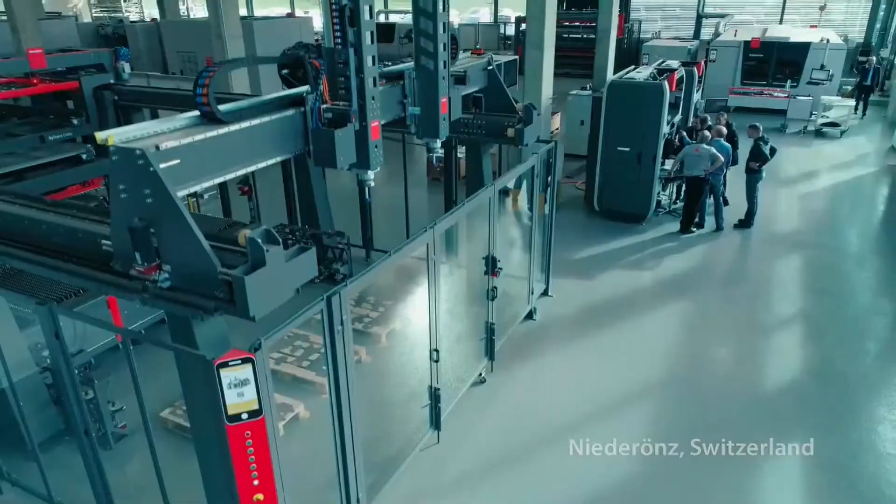Bystronic is a leading global supplier of system solutions for the sheet metal industry. We provide laser cutting systems, bending systems, automation, software solutions, and comprehensive services.

Sorry, I need a sip. He's good, no? He has a confident voice, yes. Shall we? Client happy, but please get to the end of the line this time and add a little verve. The verve is there. You may not be able to hear it right now, but you will in post-production. In post, we are in...

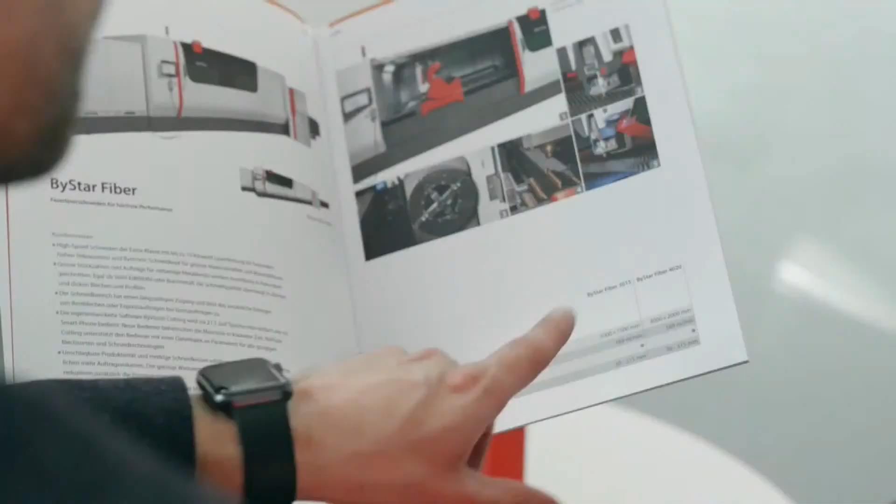We offer worldwide presence and competence. We speak your language and understand your needs. We are here for you.

Sorry, we are here for you. I hear the words, but I'm not getting anything from them, you know? Could you please just say the lines?

It means that we offer much more than just a machine. We support our customers with flexible financing models, training, maintenance, a long-term spare parts service, phone hotlines and online support. And we also operate local sales and support offices in many, many countries.

Yes, now you see, now it's coming alive. We should be saying this. It is more text, though, so we will have to renegotiate with my agent. Can't you just record it and we'll look at it later? I'd love to, but my agent would kill me. If only. Fine then, continue with the script. Right you are. Where were we? At customer service and post-sales services, would you believe? Rolling.

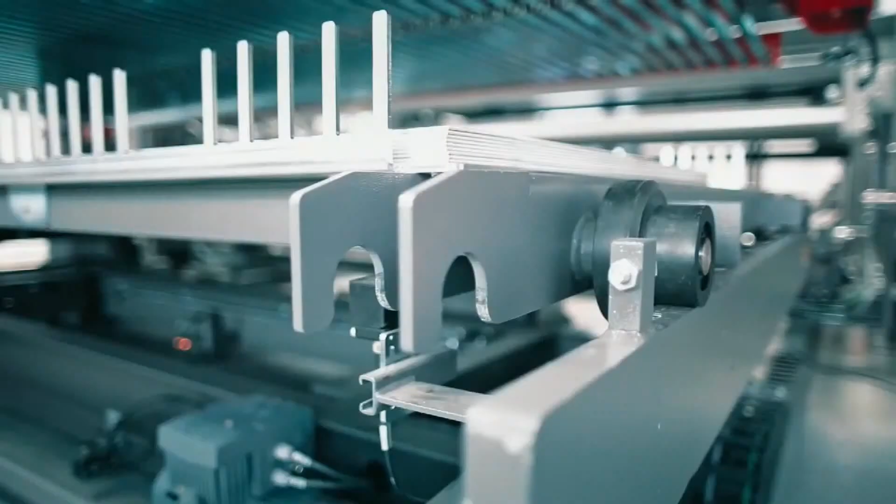We don't simply develop machines that cut or bend sheet metal. No, our customers need flexible systems for ever-changing order positions and batch sizes. Automation to achieve top productivity with integrated systems and the right software that cross-links everything.

Bystronic stands for Swiss quality. Sorry. Really? Swiss quality, I mean, it's a bit of a cliche, isn't it? And actually, while we're at it, your slogan, best choice, kind of sounds like we've just won the buzzword bingo. Guys, if you want to sort this out, I'm just going to pop out for a smoke.

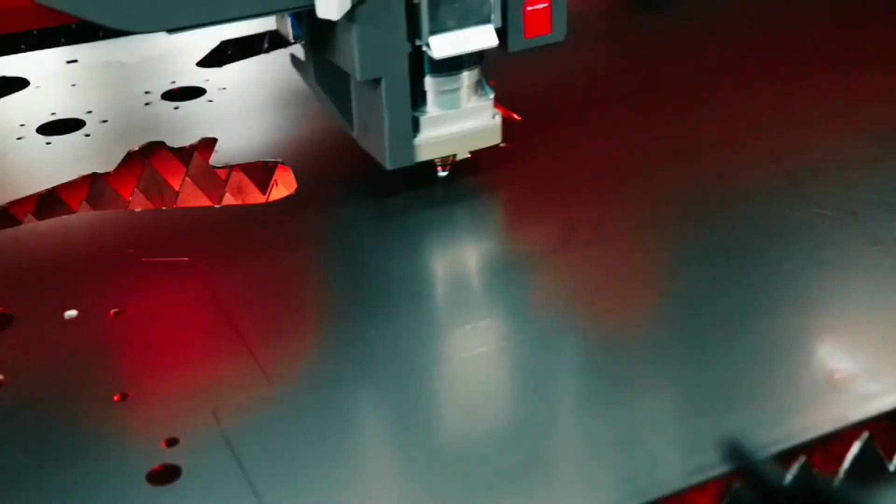Let me explain. First of all, Swiss quality. Do you know the ByStar Fiber? The Bytrans Cross or BySoft? Have you ever seen them laser cutting and bending those sheets? It's like butter. Once you've seen it, you can't help but be excited. The beauty of a laser cut, the precision of a bent metal sheet, from very small to very large, but all with the precision of Swiss clockwork, perfectly formed and expertly fitted.

Now, best choice. When you say yes to a partner, be it in business or private life, you make a commitment to the future. Bless you, Katie. Now, you're still young, but one day, you're going to want someone for the long run, someone who shares your vision for the future. You see, at Bystronic, we think about tomorrow's sheet metal processing.

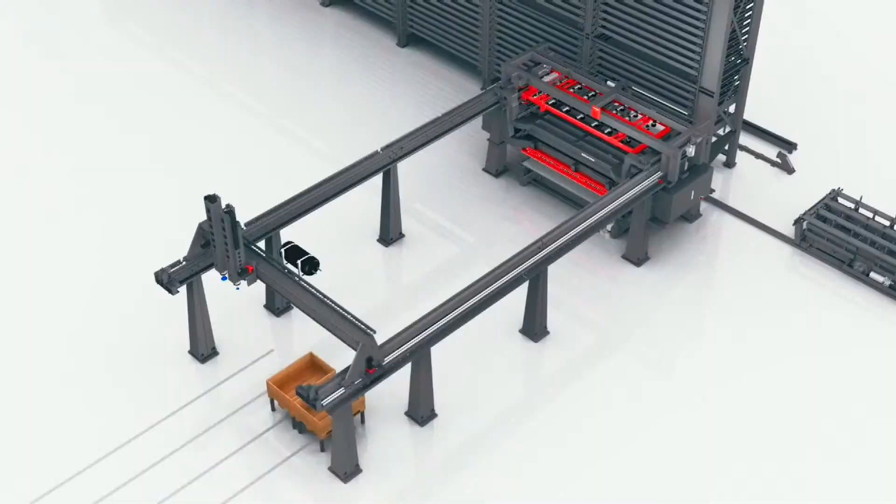We have some footage of that, right? In what we call the Smart Factory, variable orders will be produced automatically on flexible systems. A clear vision and state-of-the-art technology means cost and process optimization, which in turn means higher earnings.

And who's behind this success? The employees of Bystronic worldwide. Now, you'll say that's just another cliche, but nobody else sets new standards like they do, with their enthusiasm, their ideas, and their know-how. Actually, I stand corrected, because our success is also due to our clients. It's their feedback that we use to develop new technologies, and until they are perfectly functioning, we will not launch them. And none of our employees will settle for less, not in Asia, not in America, not in Europe, not in Switzerland, nowhere. And that's what we mean by best choice.

I'm sorry, I think I interrupted you. Did you record this? Sorry, did he say something? I couldn't hear a word. He says we're done. Really? That looked like more words to me. No, really, we're done. But you can stay here till 5, because it's in your contract. Well, no, I'm more than happy to do another version. We'll just speak to my agent later on. That's no problem. Gentlemen? Hello?

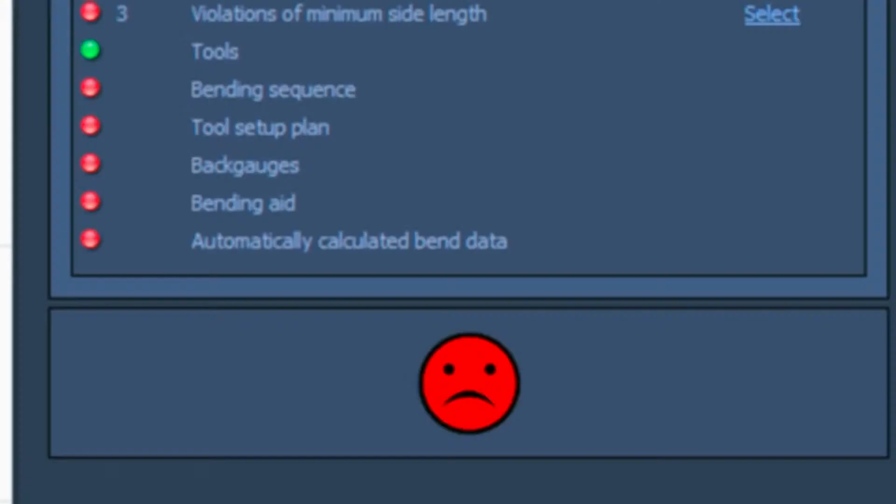All of this is set up as a process-oriented workflow from file to part, with integrated checkpoints. Oops, something is not quite right there. Not a problem. Easy done.

And of course, we want to make optimal use of the material. This is why we should better let the software handle the nesting. In BySoft 7, creating automated cutting plans is quite simply phenomenal. Thanks to the cutting time simulation, you know the complete process even before you start cutting. And all of this is that simple and intuitive.

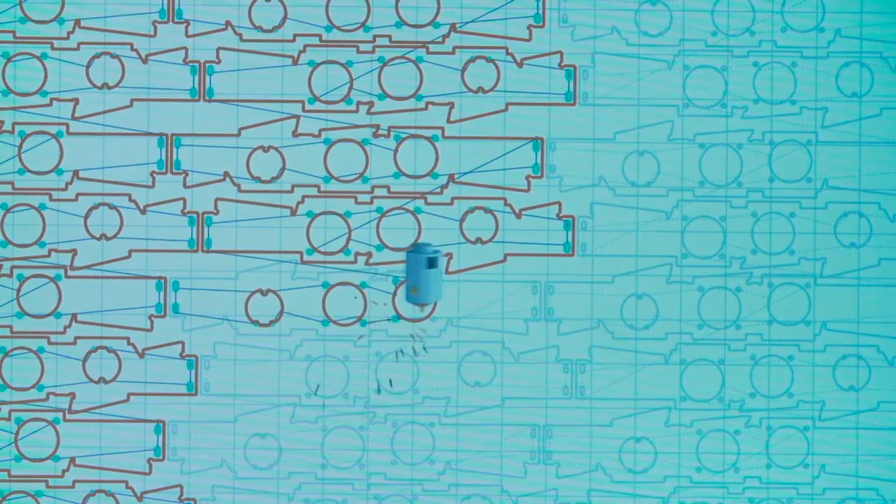From the people who prepare the orders through to the team in manufacturing, this makes everyone happy, particularly because now we can precisely calculate the production-related unit costs and prepare customer offers. Right, programming done and dusted? Well then, here we go.

The finished headlight bracket. Now, all I need is the tractor. I need the tractor! Hello? Well, I guess we were faster than expected.

BySoft 7. Make it easy.

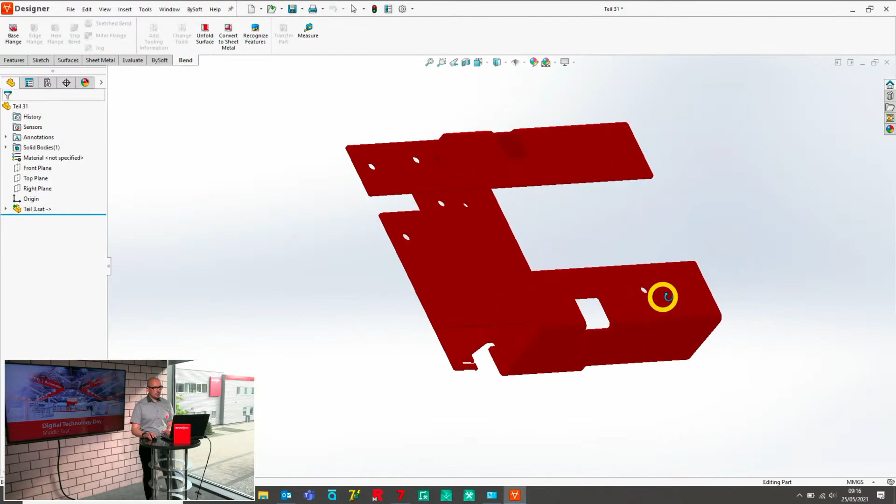First of all, we open a part. Let's say we take this one, open the part, and you see it opens in a second module. This is the part we will produce. It looks like this. First of all, we make it flat.

We have this option to select the part. Of course, if we have an assembly, we can unfold every part step by step. We just select the green sign to say, okay, this we will unfold. Now we have the flat part, and we transfer this to BySoft 7.

First of all, I get the name, which of course is the name from the part. I can rename it and so on, but I'll leave the name like this.

We can also select the material. This is important - is it a kind of steel, stainless steel, aluminium, or whatever? We have a lot of materials here in our database, and the material thickness comes from the 3D file. Then we hit the OK button, and we're finished importing.

Now we have to program the part for our machines. This is a bending part, so first we have to program the bending sequence and everything needed for the bending machine. After that, we have to program the cutting machine so we can send this to both machines and say, okay, now we cut the part and bend the part.

Okay, how it works is really simple. You see these little areas here - first is called bend, the other is cutting. If I select the bend area, the software asks me about the right bending machine.

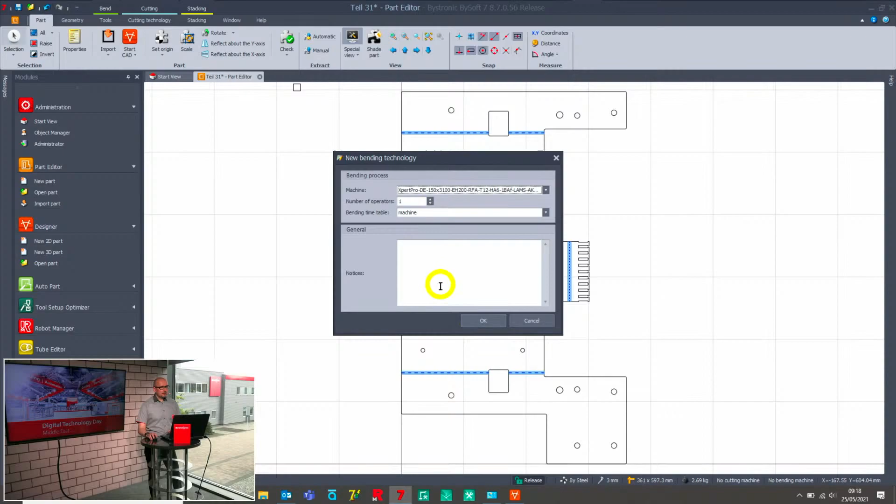If you have more than one, you can select a different one. You can say how many people you need to bend the part later on - for example, if you have a big part and need some guys to help, you can say I need 2 people. And if you like, you can also calculate the bending time.

We say okay, and now the software looks for this machine, what kind of tools we have in this machine. You can also have tool cabinets selected in the machine, so the software knows how many tools I have and what kind of tools I have. We can also have a pre-selection of tools here - this is the P5 and the V20.

If we stay in the bending area, you see a lot of points here. Now we have just these red areas. This red means it's not finished or programmed, or maybe there are some mistakes if you program this manually.

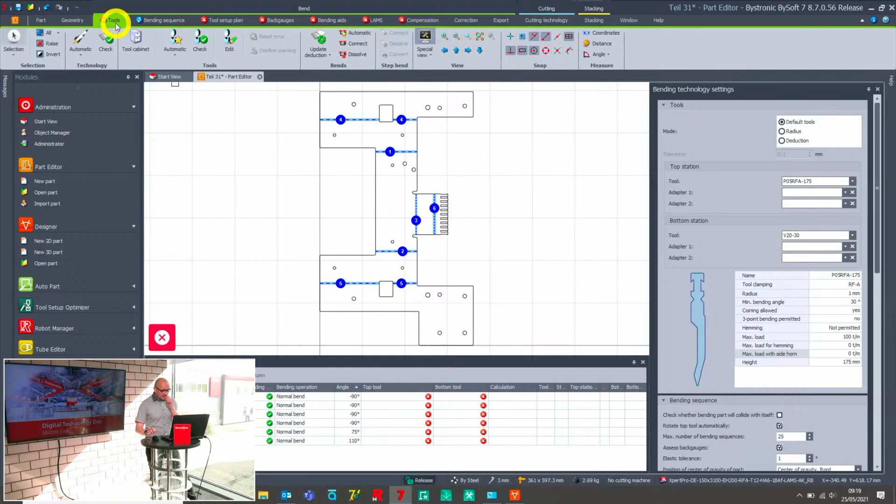Okay, how does it work now? You can hit the automatic button like this, or you can use the little automatic button, this rocket sign.

Then the software calculates everything for me. You've seen if I press this button, I can do it again. You see in the middle that the software also defined a different tool setup - it sees that I cannot use my standard tools for this material thickness and selects a different one. In our case, this is more or less the same tool, but with a different height.

Now you also see different colors here. The blue one, let me go a little closer, is my bend radius. And the yellow one is very important - this is my insert area for the die.

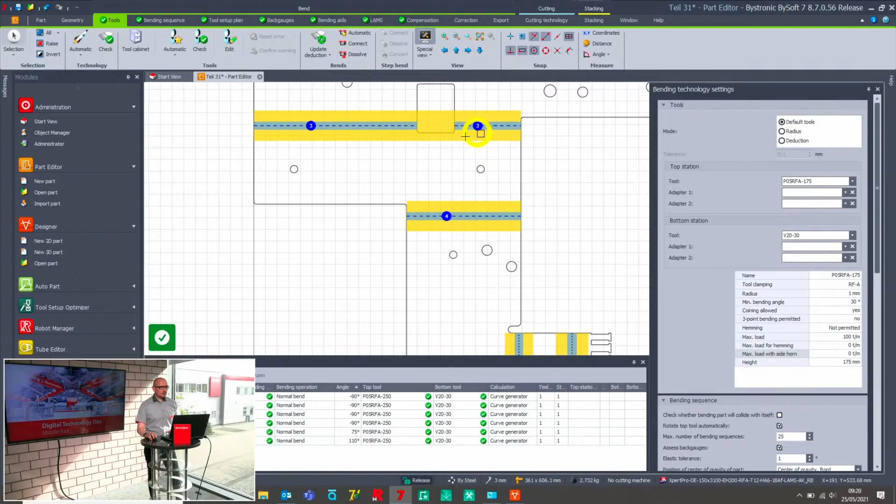This means if you have some contours inside, holes or something like this, it could deform during the bend, and the software can check for this. If you have a contour inside here, it will say please take a smaller tool or a different tool so you don't get this deformation.

In our case, everything is okay. You see now all the steps here are green, and we can save the part and move it to the bending machine. Just in case you'd like to change something, you can go to every area.

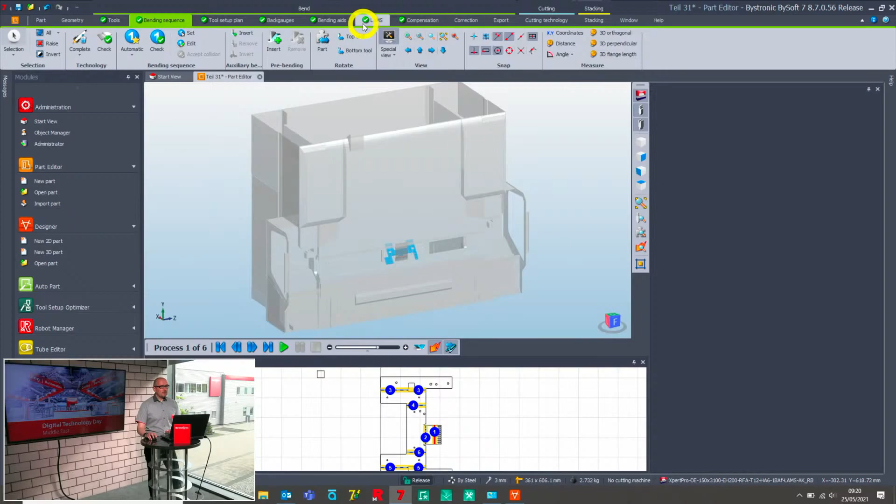This depends a bit on what kind of machines you have. You have to program the bending sequence, the tool setup, the back gauge position, of course the bending aid, and the LAMS system if you have one, and then you can transfer to the bending machine.

If you press this play button, you can also simulate the bending sequence. Sometimes it's necessary if you have a really complicated part and you get into collision, so you can look at what place you have the collision or what the problem is. In this case, the software found a great solution for us with just one tool station, and we can transfer the part to the bending machine.

How it works is really simple. We can go to the export area, and you see we have two different versions to export. Manually means I select my folder manually. If I use the normal export button, then I can export the part automatically to the bending machine.

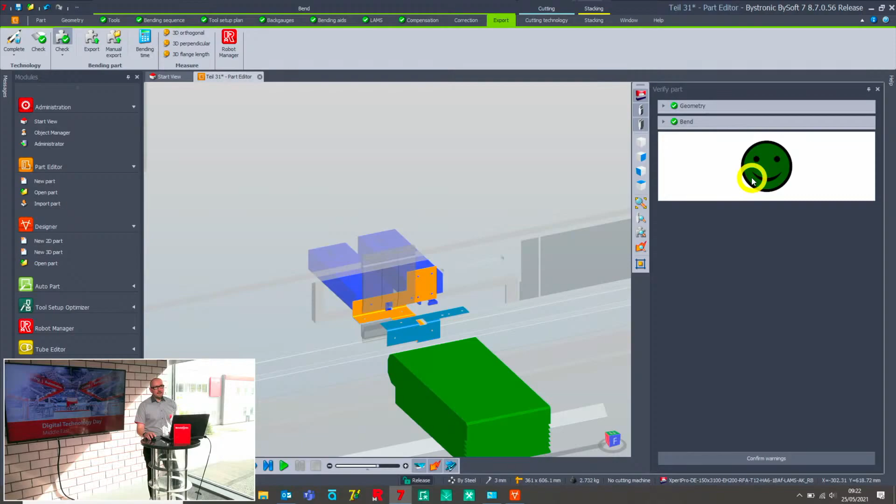If you're not really sure if everything is okay, you can hit the check button, and then you see the green smiley here. This means everything is okay. If you have some problems with the part or with the technology on the part, you get the yellow one, or if everything is really wrong, then this will be red. We check the contours, and also we check the bending technology.

Okay, now we have programmed the bending part. What is the next step? You see it's direct, close to the bending area, is the cutting area. We go to the cutting technology, select our cutting machine, hit the OK button, and this is more or less the same. If you don't like to program this manually, you can hit the rocket button for automatic generating of the cutting technology.

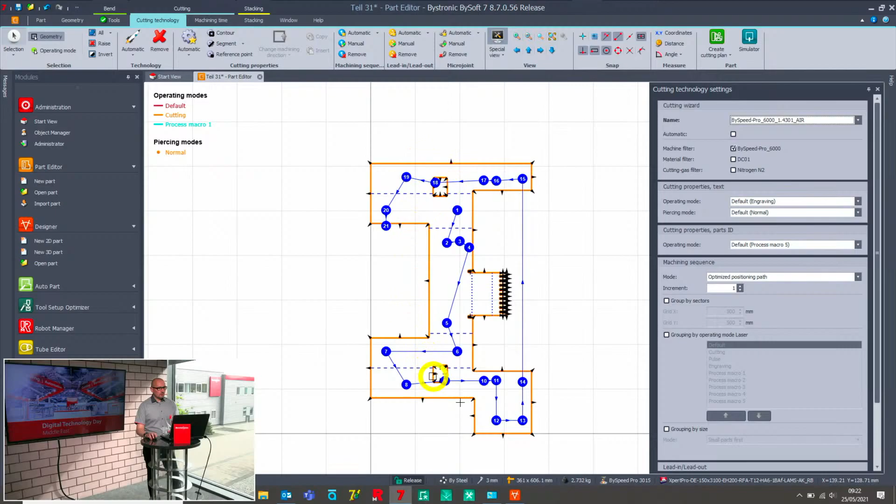This looks like this. Of course, we have to cut all the holes and the outside, and all these numbers you see are the different steps and movements the cutting machine does.

Okay, for the cutting machine, this works a little bit different, of course. We have the cutting technology on one part, but on the cutting machine, you place a whole plate of material on the machine and cut a few more parts from this material. How it works is you create a cutting plan.

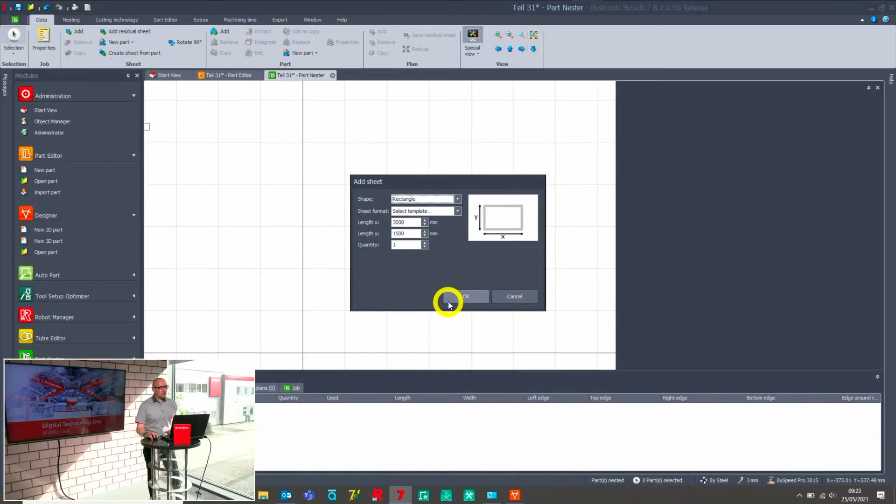We say okay, we need a new cutting plan. Then we stay here in this area. Let me delete this small plate and add a normal one. This is 3 by 1.5 meters. We already have the part, and we say we need maybe 15 or 16 parts like this. Also here we have the different areas for this cutting plan.

We go to the nesting, hit the automatic button, and the software will nest automatically all the parts. You see also the yellow sheet area here is the rest of the material. We cut that so you can store it and use it later on for different parts, smaller parts, or also these parts if you like.

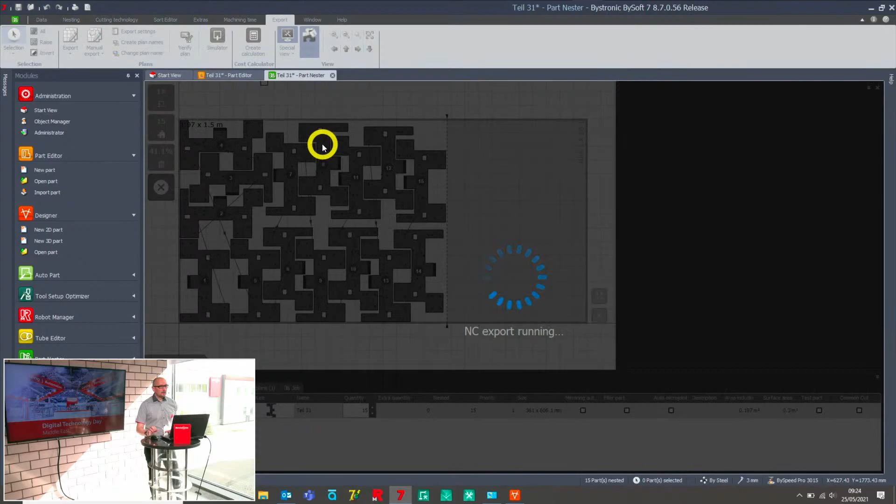The last point we have to do to have the program on the laser is also to go to the export, and we can export this plan to the machine, or if you like, you can also simulate the cutting sequence from part to the next part.

Looks like this. Okay, this is from my side, how you can import parts from 3D, do the bending program, and do also the cutting plan for the cutting machine. Okay, see you next time, and I give back to my colleagues.

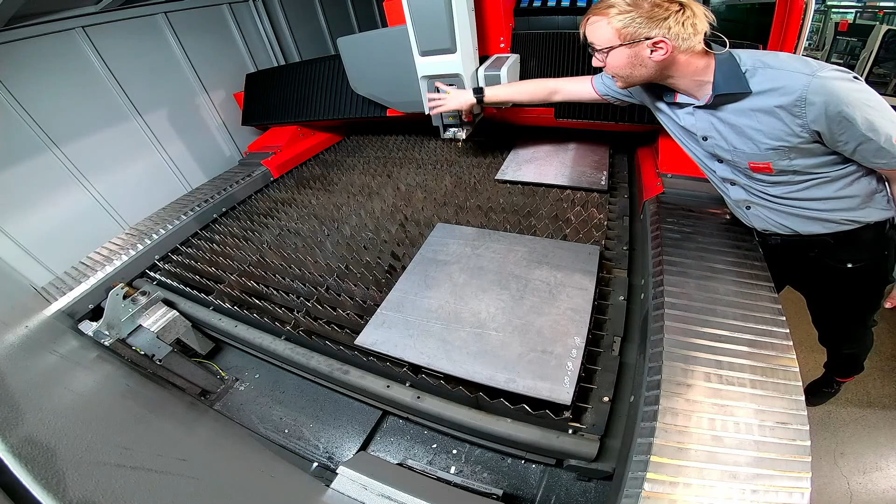We have on this machine attached a detection eye. The detection eye is a really good tool for your edge detection, which means that we are making a camera-based picture and looking how the plate lies on the table. Therefore, we have our detection eye.

What we also have on this machine is the Nozzle Changer. The Nozzle Changer is available with 64 seats, so you can have 8 different types of nozzles, and from each nozzle we can have 8 in one row.

Then we have our NTC on this machine, called Nozzle Centering or Nozzle Control tool, which helps you have precise and constant cutting work. The laser will detect even smaller collisions with upcoming parts and then automatically center the nozzle fully automatic, so you don't have to go in and do it manually. You are able to center the nozzle fully automated.

Together with this system, the Kerf Scan comes with the machine, and the Kerf Scan is a camera-based system for checking your cutting gap, which means we can make sure that your cutting gap is free of dirt or that it's cut through. So the Kerf Scan makes sure we have good cutting quality during the whole process.

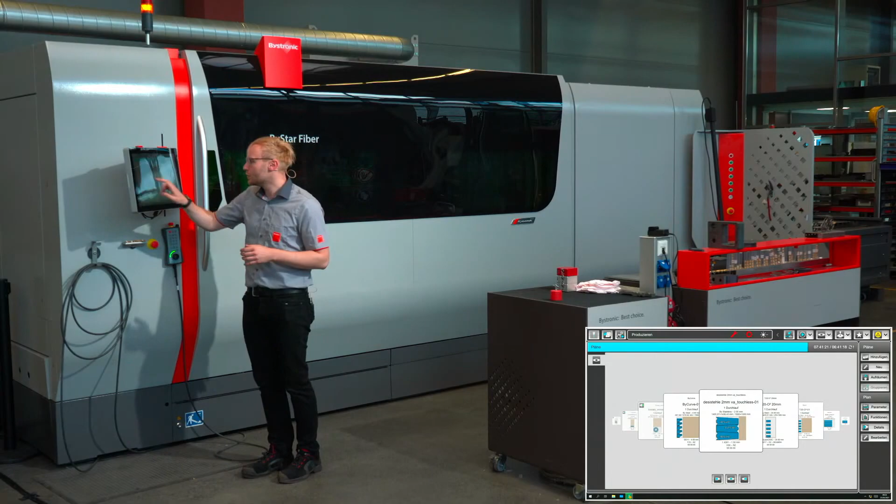We can add this plan to our control. What we see here is basically our plan pool, where all the plans we have loaded or want to work on are stored on this control. So we are quite easy and quick to have an overview about all our parts we want to make or need to make.

So the parts on the left-hand side are the parts we have done, so the plans are already cut. On the right-hand side are the plans we have to cut next. You see, we have quite a lot of different things, and we want to start with this plan.

So we're just taking the plan, drag and drop it to the start position, the position we want to cut next, and then we can say okay, we want to move it to the right-hand side, so we're not having the plan in the left down corner. We have shifted the plan a little bit to the back. That's what we want to make here.

So we have this 0-point shifting, and for this we can start with a table change. Therefore, we have to check the light barrier, and then the laser will fully automatically change the table.

With the Cont button on the control, we are able to go through the plan. And now you see that the needed nozzle, which is an H30, is not in the nozzle changer at the moment. But for the most flexibility, we are able to change these nozzles also by hand.

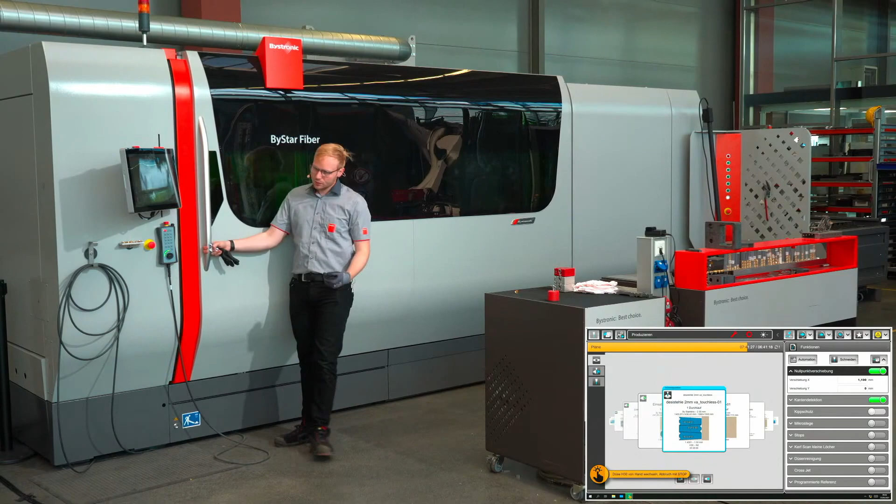So for this, we open the door, and for me now, I just click out the old nozzle you see here, and then bring in the H30, which we will have here. Now I press Cont to continue, and now we go to check everything quite well.

And now the laser goes to the edge detection using the detection eye. And with Cont, we can start the cutting process. You see, first we do the residual sheet cuttings, and then we start inside of the part.

We are now working with, let me check. With 66 meters per minute, that's what we are going now from speed.

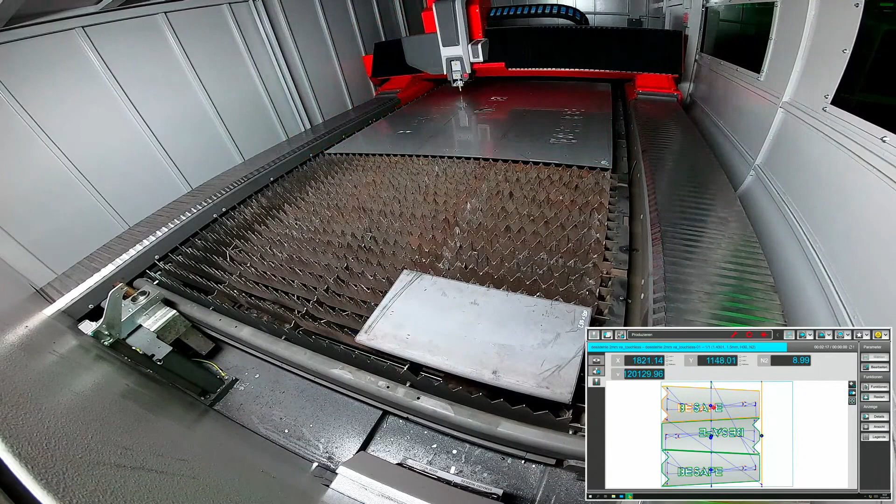Second part is now nearly done. Now we do the third one, the last one for this sheet. When you go now in the control, you will see what part we cut and on what position the laser is now working. And the last thing we will do is the residual sheet cutting.

And now the first cutting plan is done. 2 millimeter stainless steel, cut it with the ByStar fiber 15 kilowatts.

So now the tables will change. My colleague Bashir will need some parts for bending for Xpert 40, which comes later on. And for this we will cut him some parts. But I know he's a good operator, so we only need 2 of these.

And for this, I don't have to go back to my computer, to the offline software BySoft 7. I can change cutting plans really simple, also using the control directly. With this, we can edit this plan really quick, really easy. You see, I just programmed my parts.

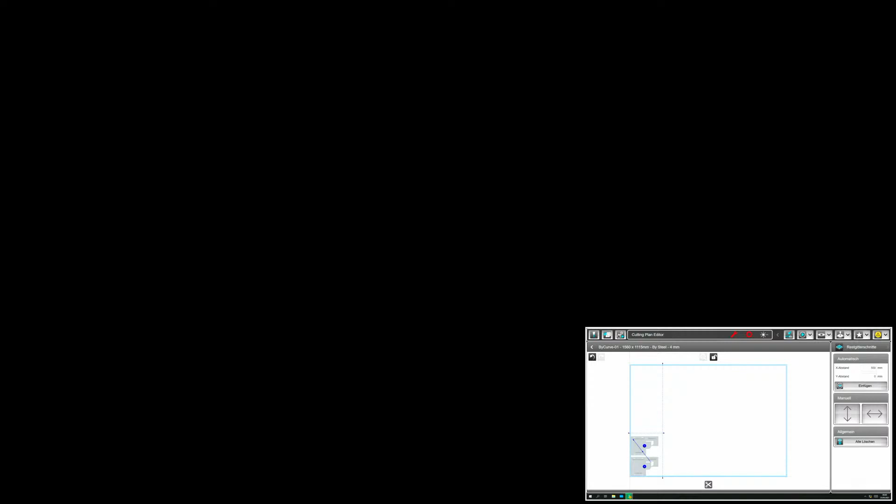You see, I have 5 in a row, but Bash only needs maybe 2. So I can take the parts and easily, using drag and drop, remove them. And for this, we can also set some residual sheet cutting to save some material. So we cut now 2 of these parts, and then make the cuts for the cutting table.

And now we can say we want to save, go back, and then start this plan for cutting 4mm steel. I have the 4mm steel now in the machine, so we can use the hand mode. I will check if everything is okay. And now we can say we want to start this plan using the shuttle table, which is inside the machine.

And now again, we have to change the nozzle by hand. F25, which is a flat nozzle for high pressure nitrogen cutting. So the 4mm steel plate we will cut and engrave with nitrogen. We can cut with the 15 kilowatt machine up to 12mm really easy using nitrogen gas in steel.

After this, we'll go a little bit deeper into the cutting process using oxygen with the beam shaper. Now we have again set the plan, press Cont, and start also this plan.

So first thing is here engraving. So we are also able to engrave parts, for example, for a data matrix or QR code, to make sure that my colleague on the bending machine knows what part he has to bend using a barcode scanner. So you can scan the part using the data matrix code and have the perfect program for this part also on the machine.

I have to look now for the correct nozzle, and then we can run through the process. So for this, 7070 comes in the machine.

And now we want to cut with the beam shaper. Laser set it up now. Edge detection as before.

Okay, for this we want to first make sure that we are centering the nozzle again. Now we can easily go through the cutting process for the second part.

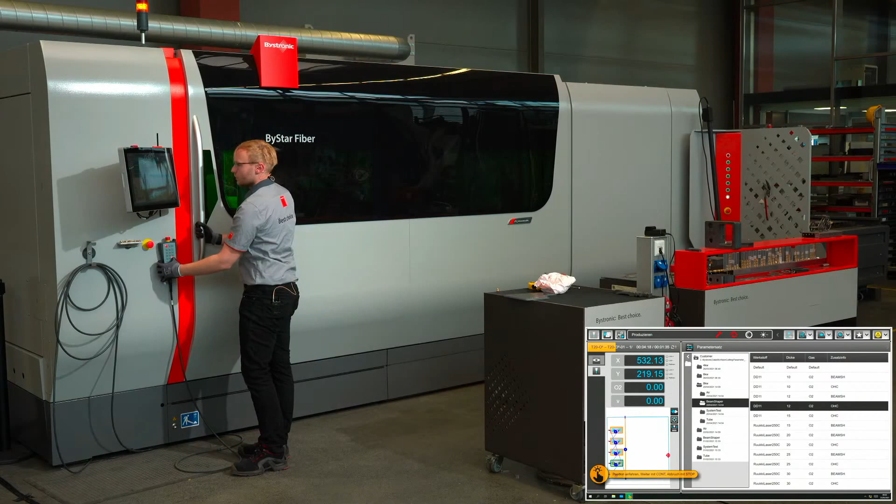We can now go and use not the standard beam shaper parameters. We are also able to use the parameters for oxygen high cutting. And now you see that we have much more speed in it.

The cutting quality is the same as in 10 millimeter, but you see the speed was much, much faster.

To show you that this is also possible with some thicker material, we will now cut this in 20 millimeters. So I just cancel this plan, and now we want to use the 20 millimeter parameter.

So for this, I'm just checking my correct nozzle. We need the 3017 nozzle for this cutting plan. I'm just checking for this.

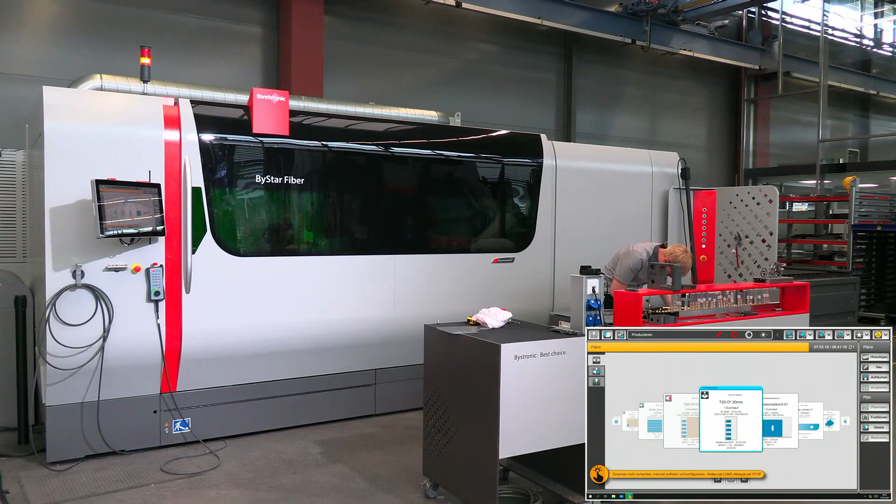You see I have a lot of different nozzles here for really different parts and really different materials. I need 3017 for this, and there you have it. So 3017, we have to put in the laser.

And again, now we can cut the part like before. Again, edge detection.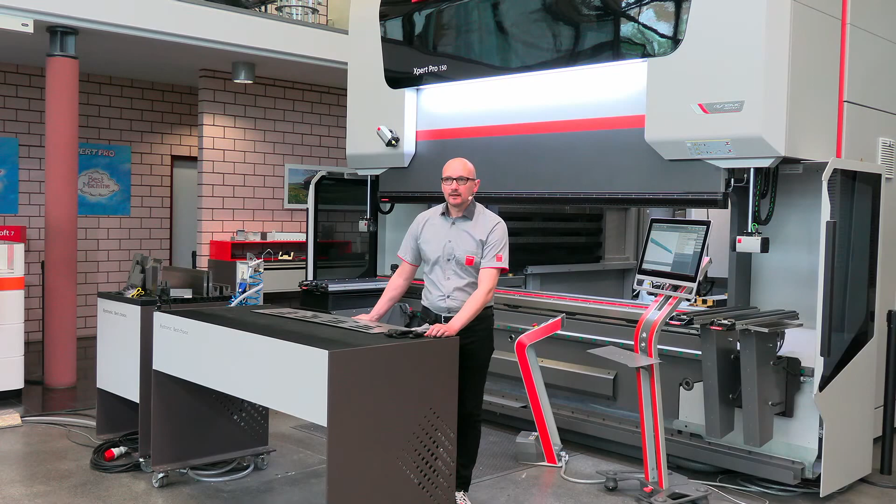You see the machine behind me. This series goes from 100 tons to 320 tons, and the bending length is 3 meter and 4 meter. You have seen before how we program the parts for the bending machine and also for the cutting machine, which you see before me.

How we can program parts on our control - this is one important point I like to explain. The other point I like to explain a little bit on our machine is how we get a straight bend line, or every time the right angle on every point on the bending machine. These are two topics I like to explain, and also a little bit during we working on the machine and programming.

First of all, how we can program a part on our control here. You have seen how we do it on our offline software. If we have an offline program, we go to the loading area and can, of course, load the parts. You see all the flat parts - this comes from BySoft 7. And the parts look like this one, for example, which we have programmed on the control itself.

Okay, let me go back to the main menu. We like to start a new part. We say new, and you see we have two different types. Numerical, of course, you can type some numbers and bend with the machine. We would like to program a part geometrical.

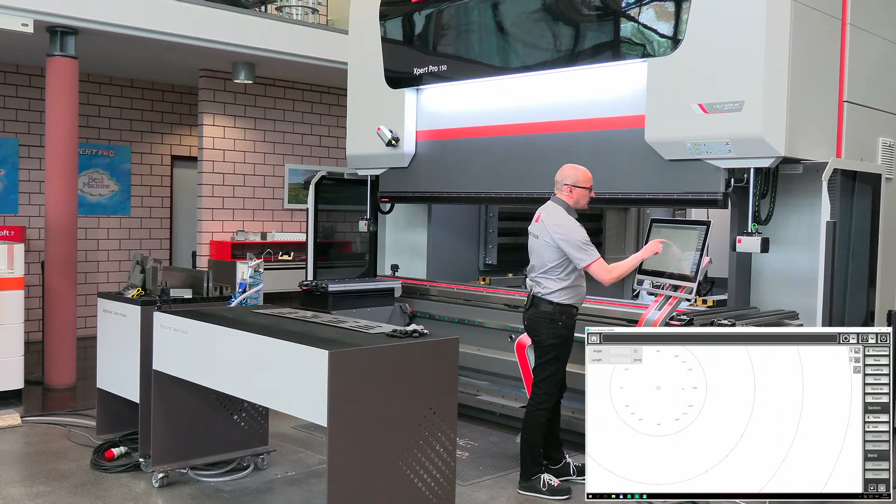For example, we search and start a point everywhere on the screen - you can define it by your own, and then we can use your fingers to draw the part like this. You can slide a little bit, and you can also rotate around your program point for the different angles.

You can also use the fields here on top to change the values however you like. For our part, we need 5 bends. We have 1, 2, 3, 4, 5. Now you see, okay, maybe the bend lengths are not correct. The bend angle, I will double check.

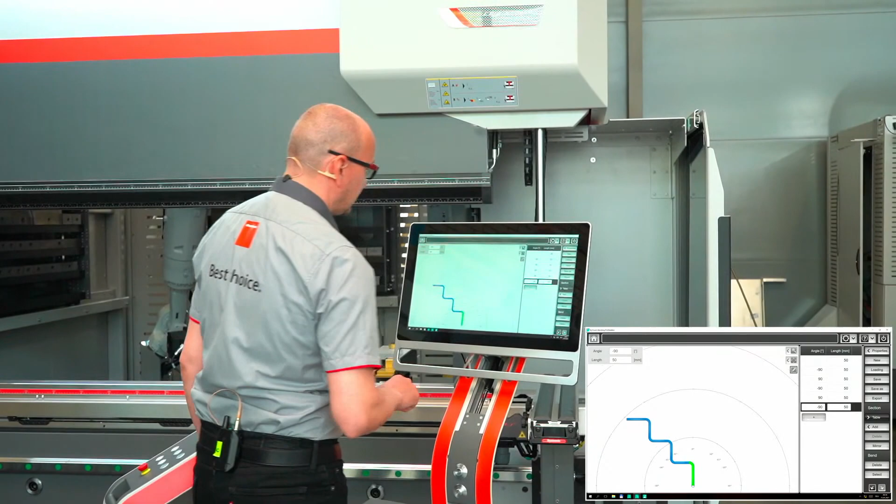We also have this section to program in part like in a table, and then we see all our bending lengths and also our angles. The angles are okay, I will just change my length. Let me say 50, 50, and the last 2 lengths are also 50. Okay, looks like this, 1, 2, 3, 4, 5 bends. This is exactly what we want.

We can go to properties again. You can remember we selected this before, and we can also go to section, and we see here a little bit on top the blank size if you need this.

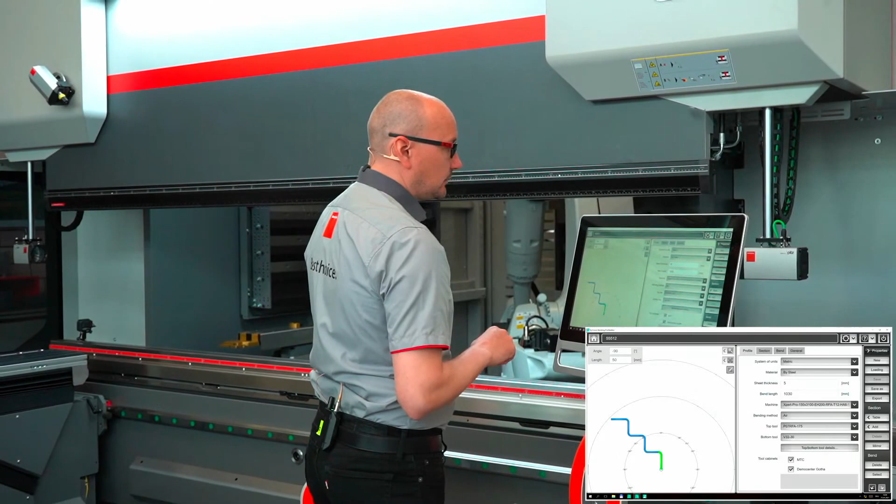What we do in the next step, first of all we have programmed our part, this is like a drawing you can say. We say okay, we will export the part. Say the part has maybe some drawing number, I take this one, and then we are in the software to operate with the machine.

Now the machine doesn't know about how we like to handle the part. You see it here in this area, this is a little bit of a red sign. This means the machine has no idea what is the first bend, the second bend, and so on.

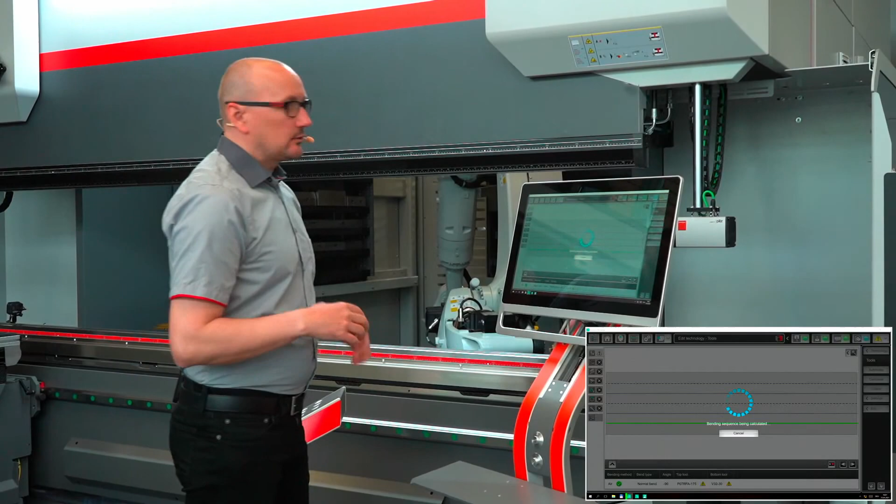Maybe you can remember on the demonstration for the offline software, there is a little rocket button to do everything automatically. We can do the same here. If I press these little wheels, looks like a gearbox, then the software calculates everything for me - this means the bending sequence, the tool setup plan, and so on.

Okay, if the software is ready, then we start immediately in this area for producing the part. If I like to change something, or maybe I will just check the technology, I can go to this area with the head. You see all the green signs mean everything is normally okay, but let me double check if the bending sequence, for example, is right for me. This is the first bend, this is the second bend, and so on.

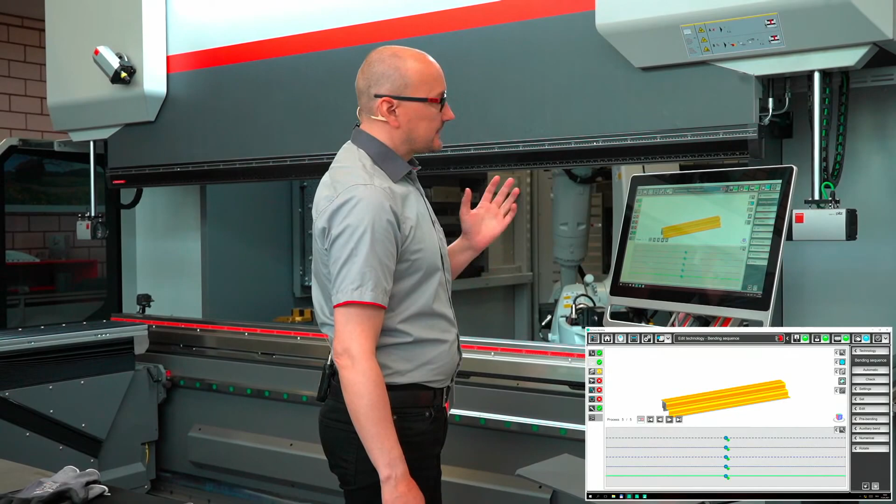Maybe this one I like to rotate. It's really simple, I say just for this process I will rotate, and all the bendings are like I will do. Now you see the signs are changing a little bit. The green one means everything's okay, the yellow one means I have a little bit to check, and the red one means something is wrong or maybe something is just missing.

I don't like to program everything. I just hit the wheels and the software calculates for me the right things so that I can start.

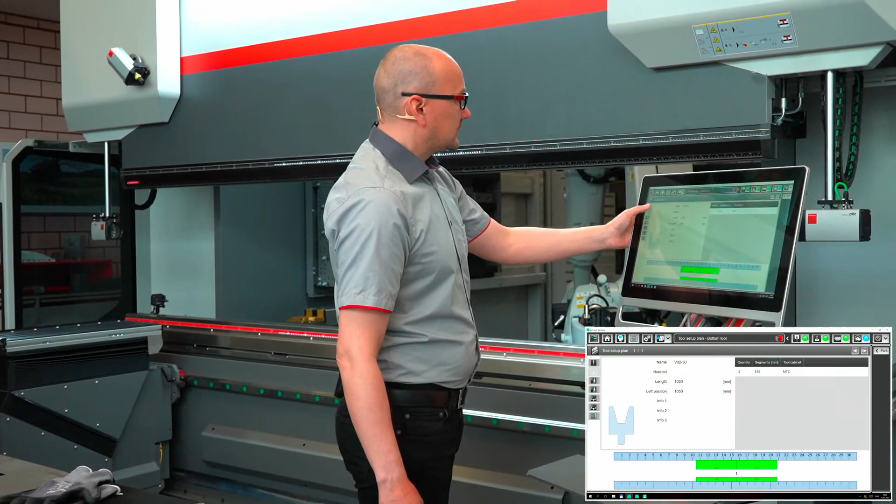First of all, of course, I need some tools. We can go to the tool setup plan, then we see what kind of tools we use. Of course, I have still programmed the P7 and the V32 and how many segments I need. And of course, you see also here, if you have this option with these lights, the optical bend guide system, on what place I have to put the tools.

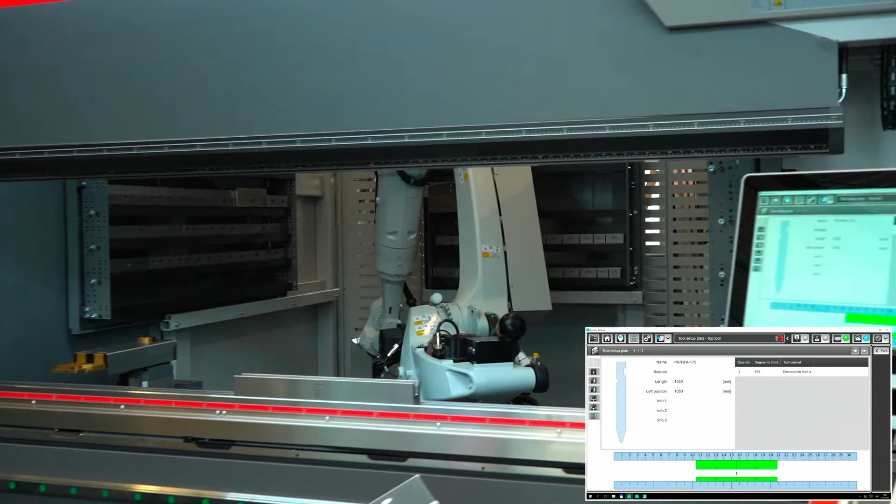Okay, then let me open the tool clamping. We have some buttons here on the control, you see the lights are blinking, this is just a sign for me that the tool clamping is open. I take my tools, move it in the machine like this. This is really simple, just standing on the right place, you have the lights here. We can later on double check if it's the right position for the top tool and the bottom tool.

And for the top tool it's also really easy. I just hang this inside the machine. This holds automatically inside, and later on I have just closed the clamping.

Okay, looks like this. I can also move the tools on the position however you like. I just close my clamping, the top tool clamping and the bottom tool clamping. Then you see the light is still lighting, not flashing - this means the clamping is closed, and then we can go to the produce area.

I hit the first time the foot pedal. You see the backstops are moving in front, and also the safety system moving to the right position. The right position means the right height of the tool. We're looking around the tools so that nobody goes in with the fingers, and if I hold the fingers inside, you see the machine stops so that the operator is safe if he is operating with the machine.

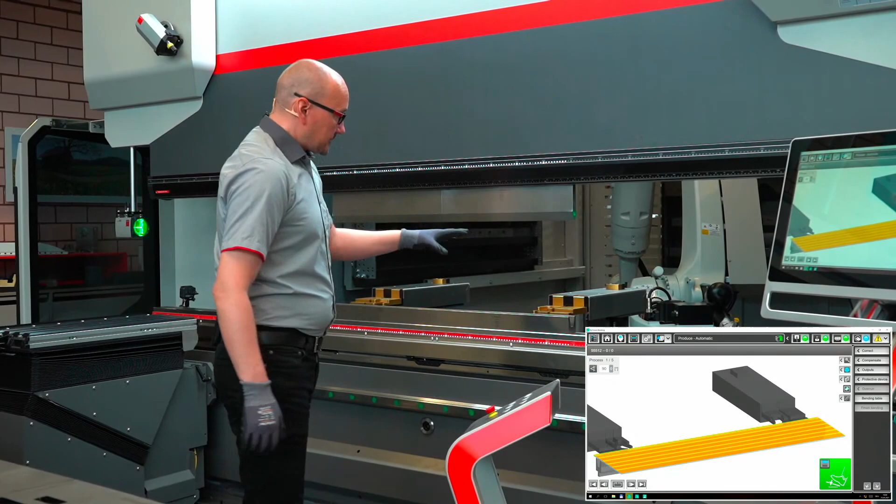The back gauges are moving to the first bend step, of course. There are different back gauges.

We have 4-axis back gauge, 5-axis back gauge, and on this machine a 6-axis back gauge. This means both fingers are moving separately in three directions: X and Z direction, left and right, and up and down is the R direction.

Okay, this is the first one, how you program in part. Really, really simple. The next one is how we get the right bend angle on every position, or the same bend angle on every position on the machine. For this, we have the crowning system.

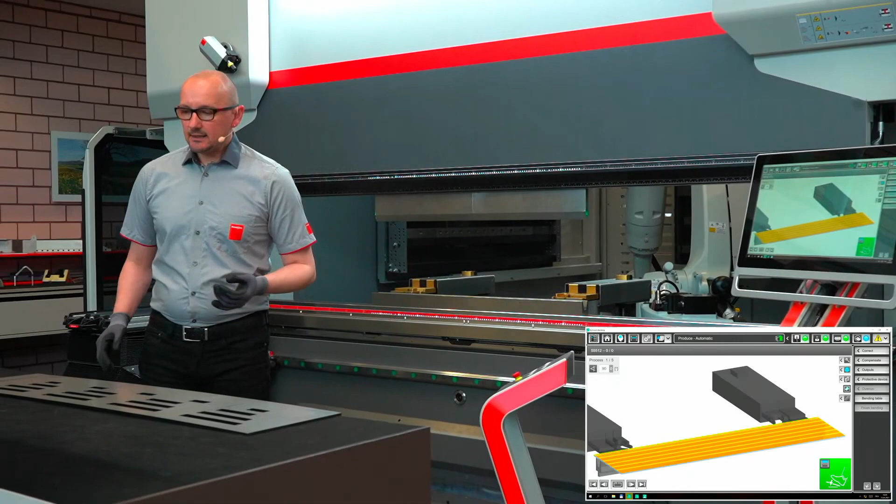The crowning system is a little bit special on our machines. This is not with a special table. All the other machines on the market have a special table for this. We have a dynamic crowning. This works with the hydraulic cylinders. They are on the bottom of the machine, like here. And during the bend, we are measuring the real force we need to bend and adjust the crowning system immediately.

During the bend, what this means I will show on this part. You see the part has different holes. This simulates different bend lengths, for example. And we have programmed just 1 meter bend length for this part. The machine doesn't know about the holes.

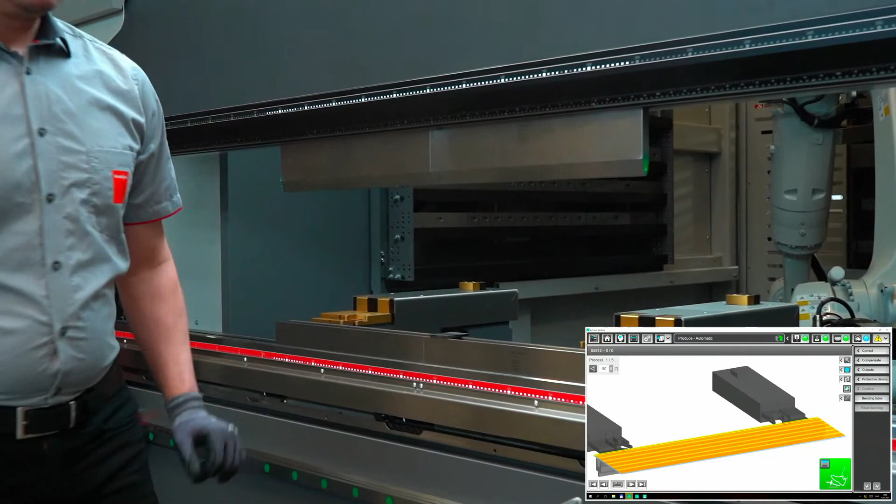First of all, I use some small parts for reference that we can later hold in the part to double check if the bend angle is the same. I place this on the machine. We just go to this area, maybe this one. Then you also see what the machine does during the bending sequence: machine moves down, measuring the force, and adjusts the crowning system.

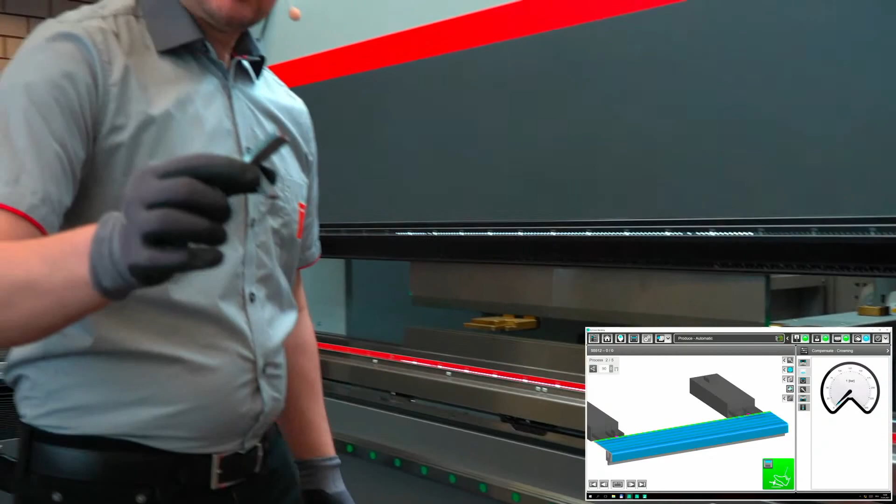Okay, let me start the machine. We bend, and we have this little part. This is our reference part. Let me place this to this position, and then we can bend our part.

I just swipe to the first bend, then we start. Maybe I start with the part with the long holes, then we have less force and ends on the other side. Okay, first of all, I start that we have the back gauge on the right position. We do the bend. Now we have, of course, a little bit more force.

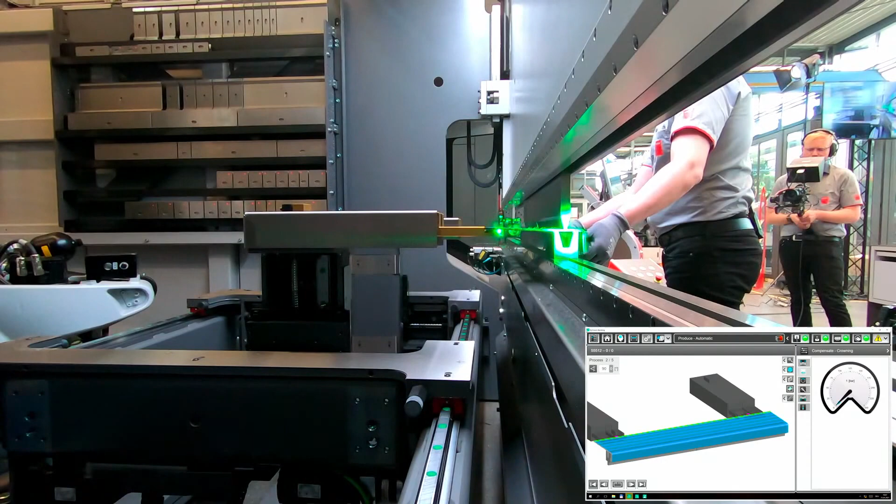And the machine is adjusting automatically for this. Then we hold the part inside, like this. And you can also see on your view on the screen from the control that the machine is rising up, not only the force to bend the part, this is also changing automatically the crowning system.

Okay, this is fully automatic. You don't need to program anything. Okay, what's now if you say the bending position is not really in the middle of the machine?

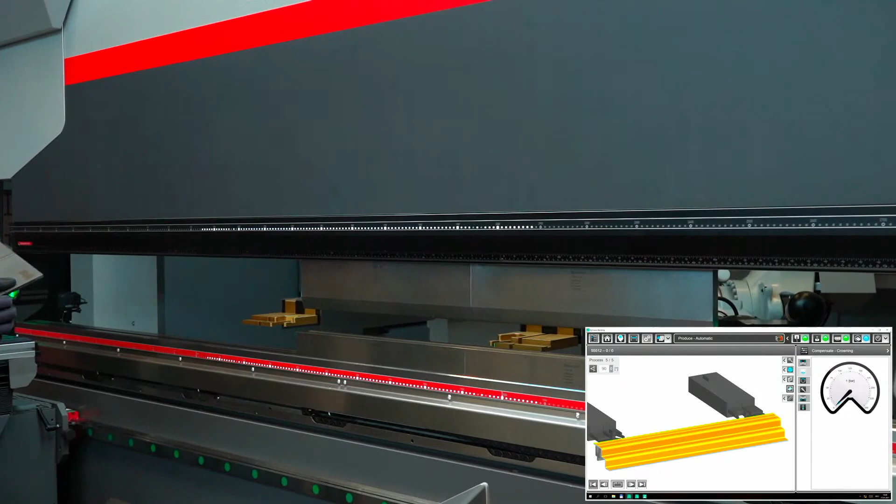Let me show this, move the tools a little bit to the side. Let me say maybe to this one, so you can see it a little bit easier. I will do this on this side, close the clamping again, and bend here. Normally this doesn't work, of course, since I shifted the tools. The machine doesn't know about this, but in our case, the machine sees that we are moving to the right side and adjusts the machine or the compensation system automatically.

Let me place the part here on the table. You can remember we have this little part here, and I hope you see it. If I place this little part here over all the bends, you see this is every time the same angle without some correction or some things I have to do. And this is very easy to use and very simple, and one of our best options or things on our machines. This goes completely automatically.

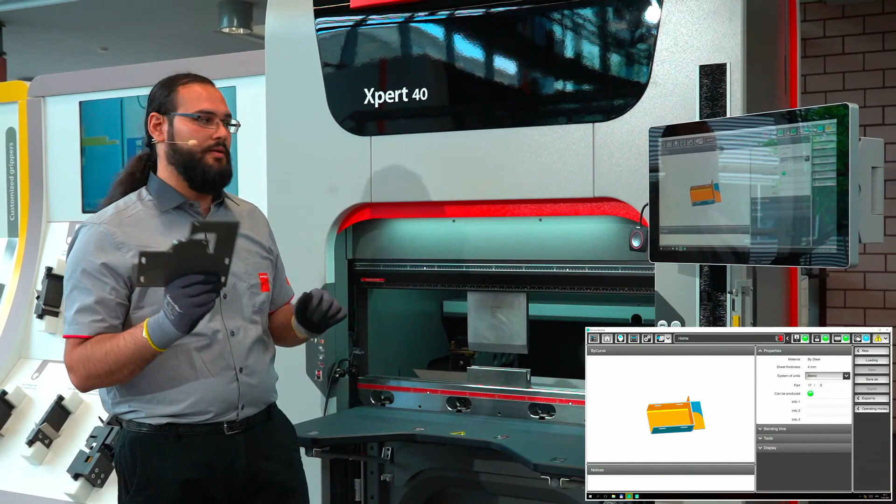So we can see here, this is the part, and I have also the tool what I need for bending this part on the machine. I would like to check at first where is my tool. I press on the tool setup plan, and I look also if my tool is in the right position on the machine.

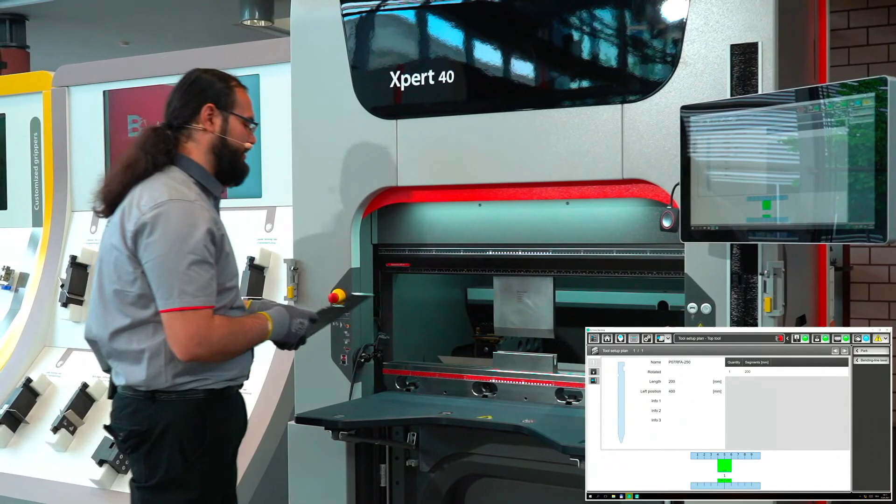I have the table here in front of me. We can move it to the front, to the back, and we can also keep it down, like this, if we would like to use it. So it's easy to use.

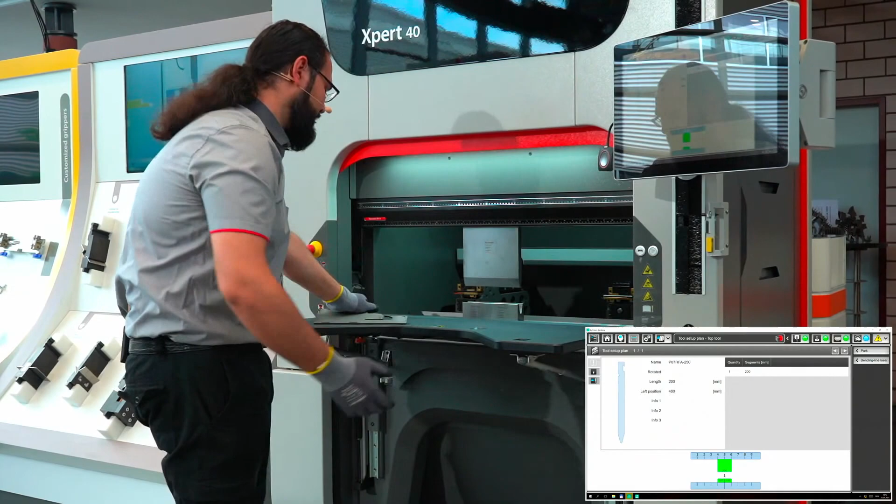It's not that hard. It's also for helping the user with the work on the machine. It's easy. You can do it at the high position also, and push it to the side, to the back, and to the front again for a better position in front of the machine.

So I would like to put it like this because I don't need it. I don't need it now for my part.

And I have also on the side the cabinet. I can put here also my tool on the side, the lower tool down, and the upper tool upstairs, and also my tool for measuring all the stuff on the side of the machine.

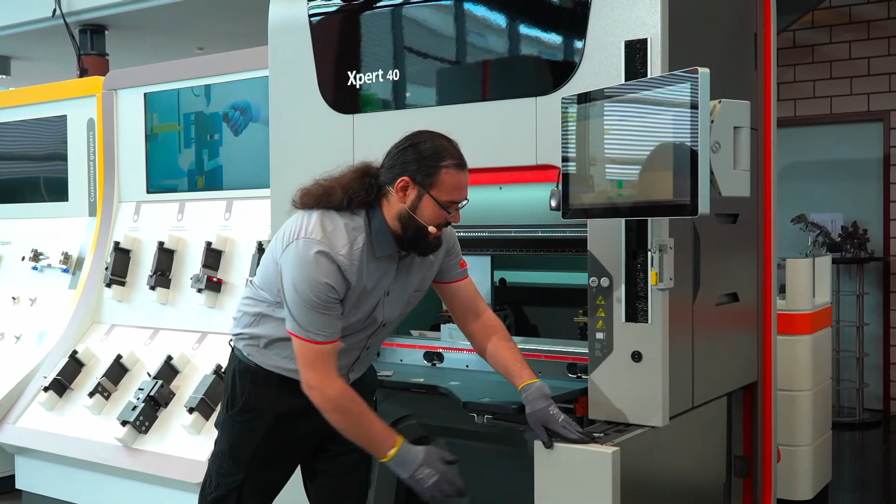Also, I have on the left side, on the side of the machine, this cabinet also for putting the tool inside the machine if I need it for work, or my work pieces. I can put it also inside.

So for bending this part, I would like to go to the producing position. I am here. You can see here, this is my part and how it looks like inside the machine.

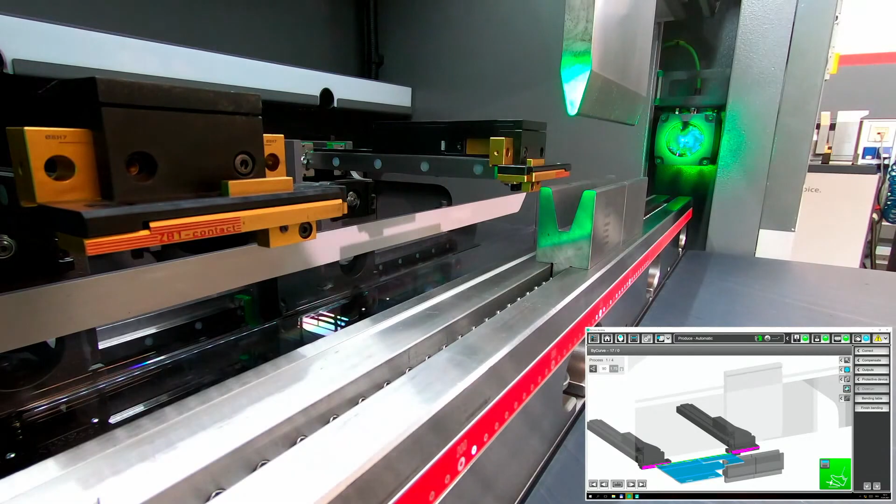And what I have to press, so that the package can come to me and work and help me for bending this part. So if I press at the right side, the tool package will come to me and stand on the right position for bending.

So you can see also, we can see our part in 3D. I can move it up and down and zoom in to see where's the right position for my part in the machine. So you can see, it's like this.

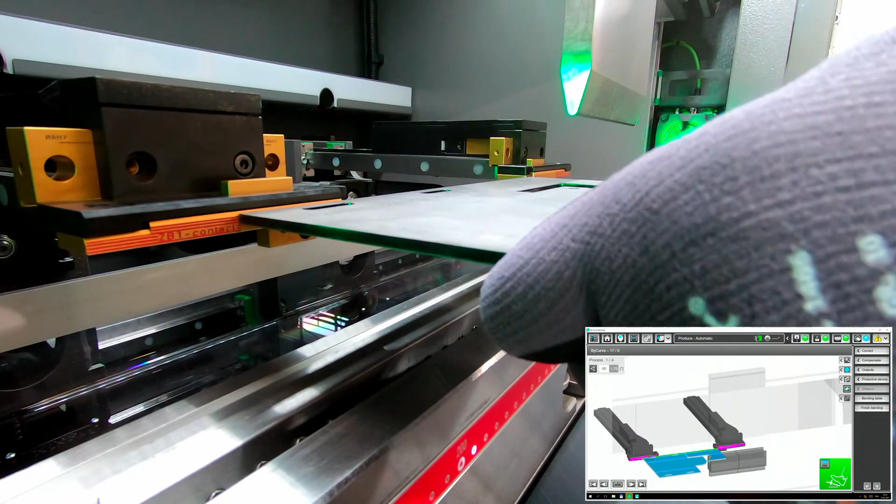So I put it inside on the right position as we see in the machine. So I press it like this. And I will take it out.

We have also, we can see here the angle measure system. What we have on the machine, it's built into the fast bend, and it can measure the angle that we have inside the machine.

Also, we have on the back the optical tool detection. It's a camera for the position of the tool. That's helping the customer or the user put the tool in the right position in the machine. That's a good thing that we have inside the machine.

We have also a small tool. It's a laser. You can see here the laser on the table. And when I put my part inside the machine, as we see in the 3D part, like this, you can see here the laser on the machine.

It tells me where's the position of my part and how I can bend it. It's like this. See it, and we can start to bend.

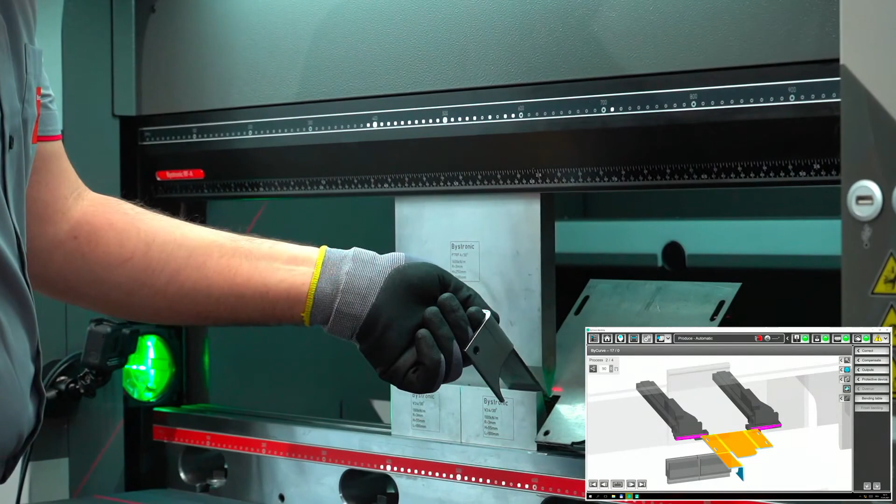So you can see this is the next one. And afterward, it's also for helping me, the laser here on the side.

Also the same. This is for the last bend. You can see also the position of my part. I can press also on the side here, and I can see how it looks like afterward when I bend the part. That way I can know where the movement of my bent part will be afterward.

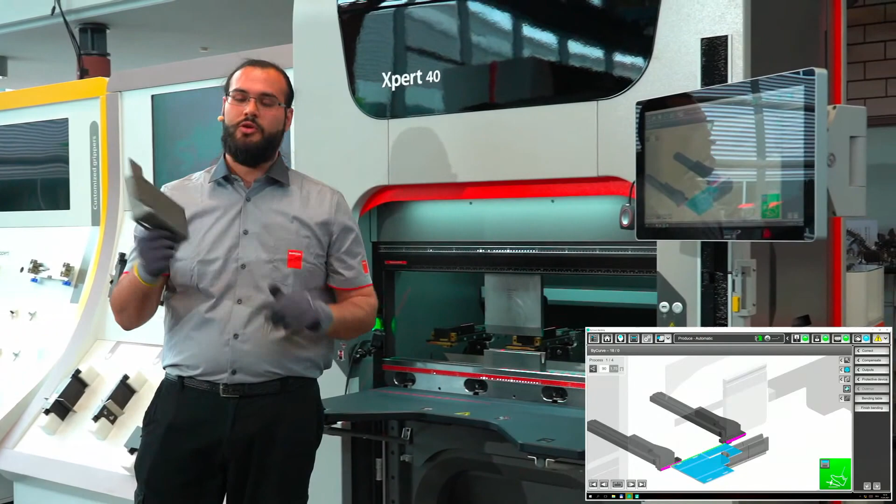So I press it, and I start with the bend. So I'm finished with my part, and I did the part. It looks very perfect now.